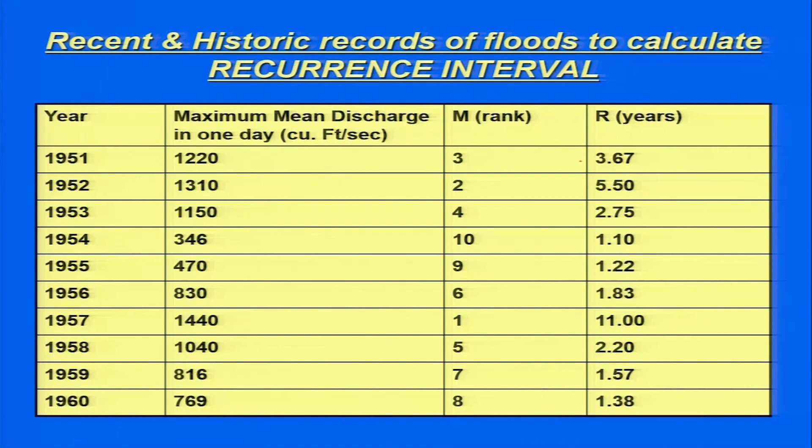Nevertheless, the recurrence interval plays a very important role in flood controls and hazard analysis. For flood controls, the river channel is considered to be in flooding stage when runoff and water spill over the banks.

Based on the cross sectional area and amount of precipitation, the runoff will be controlled by the deposits or the lithology of that particular site or basin.

We saw examples in terms of sandy soil - if the lithology is purely sand which is very porous, infiltration will be very fast and we will have less runoff, which can also be reflected in terms of the drainage density we discussed in previous lectures.

During floods, streams carry and deposit excess mixed sediments, that is bed load, so it is required that the channel should be periodically cleaned. There is an example I will show quickly in the next slide.

This point is mainly for the cross sectional area. If you don't clean the channel, during floods it will deposit excess load that has been carried, because more water is available and the velocity will be higher. So you will have more mixed sediments as bed load deposited after the flood is over, which will reduce the cross sectional area of the channel.

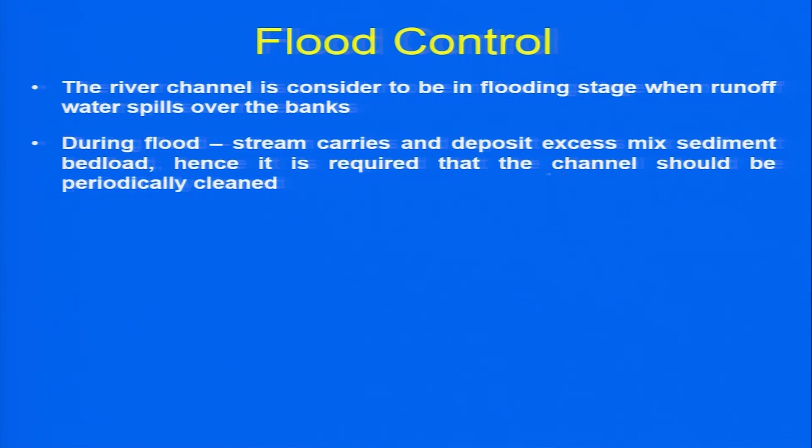Hence you need periodic cleanup of the channel, so that the river bed level is not raised and the height of the banks is deep enough to provide easy way to the next flood water. In most developed countries, and even a few examples from India...

...river training has been done, where a river is forced to flow through a particular path, so that you siphon out the water as early as possible, providing easy way for the water to flow.

Additionally, flood protection can be gained by construction of short walls adjacent to banks - we have seen the example of artificial levee, from 1 to 3 feet high, which may allow some vegetation to grow within the river channel.

There are more examples from Japan and elsewhere which we will discuss in a couple of slides later. These different techniques also benefit wildlife, fish population, and create a scenic view.

In Ahmedabad, the Gujarat government has created a river front, which has also created several parks along its banks, as well as roads for pedestrians and beautiful roads constructed along it.

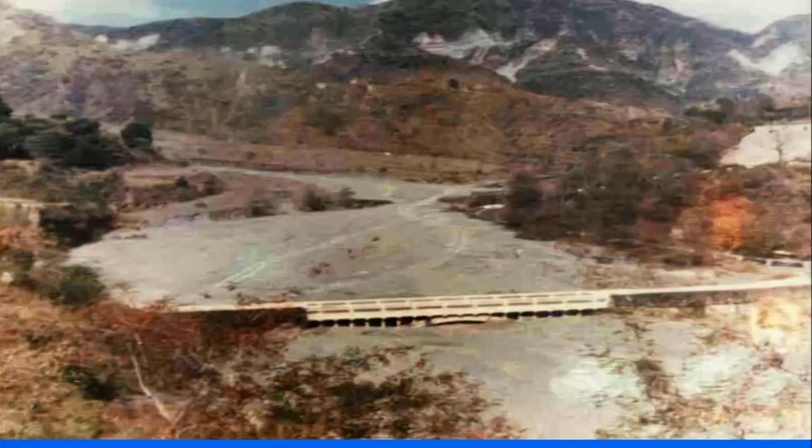At the same time, the depth of the river channel has been maintained because it is completely lined up - essentially an artificial levee - which has resulted in an easy way for the water to pass through. This is the example we also discussed when talking about landslides.

If you talk in terms of floods, this is an old photograph taken in the 1960s showing an active landslide, where loose material is present because of the main boundary thrust shear zone.

A lot of loose material is available, and even a smaller amount of rain will put the material into this channel. Slowly, this bridge gets covered up, so the water will definitely spill over on this road or connecting bridge between two sides of the banks.

So what they do is periodically dredge the channel, creating enough cross sectional area to allow the water to flow down.

To stop the sediments getting filled up in this part particularly, they constructed a retaining wall, but that did not work, as I discussed in the previous lectures when we were talking about the landslide.

It broke because of the subsurface erosion within the channel.

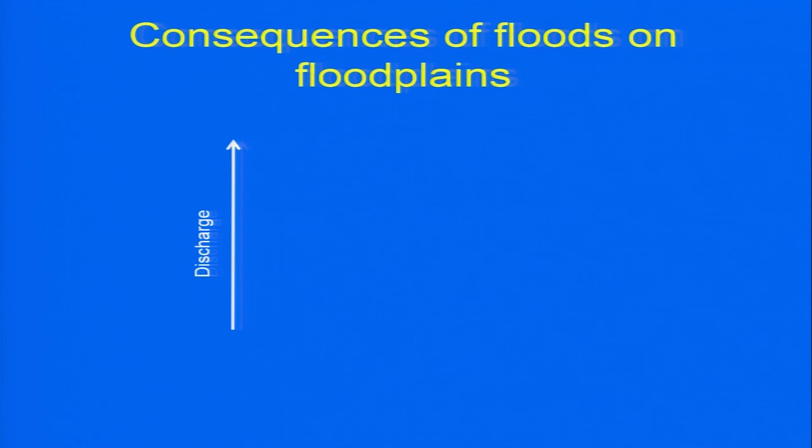Now, consequences of floods on the floodplains - this is, of course, because of our own mistakes.

If you take the hydrograph with discharge on the y-axis and time on the x-axis, the period of rain remains the same, and this hydrograph is quite smooth. It is not spiked, but it is quite smooth.

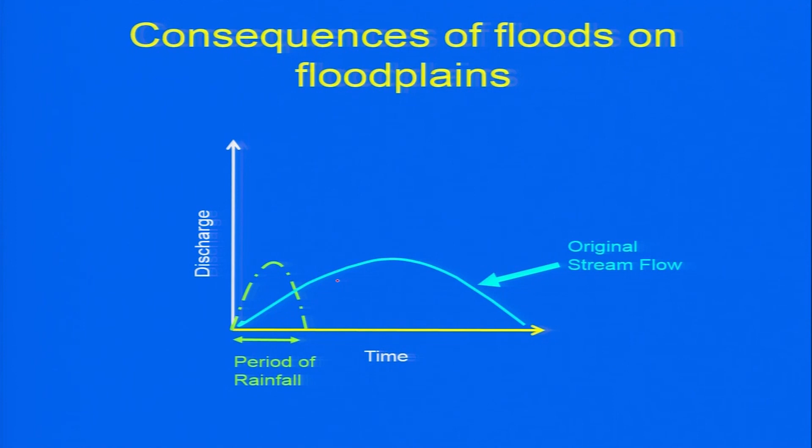This is the original stream flow. So if you are not having anything within the stream, or you have not altered the stream.

You have not constructed your houses or settlements in the way of the stream - then the natural flow was this, that is the hydrograph. So it will take time to come up to the flooding stage.

However, this hydrograph is after urbanization. So basically, what we have seen and experienced in most cities is that we fill up

several low-lying areas, or maybe the channels, and block the channels, and after doing the artificial filling, we use that land for urbanization.

This is very common, either for the construction of parks, or you come up with some colonies or settlements, that is, civil structures. So this hydrograph is after urbanization.

So the time lag which has been seen from the original is this one here - this is a time lag. So very shortly after the rainfall it remains constant here, but the

discharge has increased. At the same time, the time between the rainfall and the river getting into the flooding stage has also reduced.

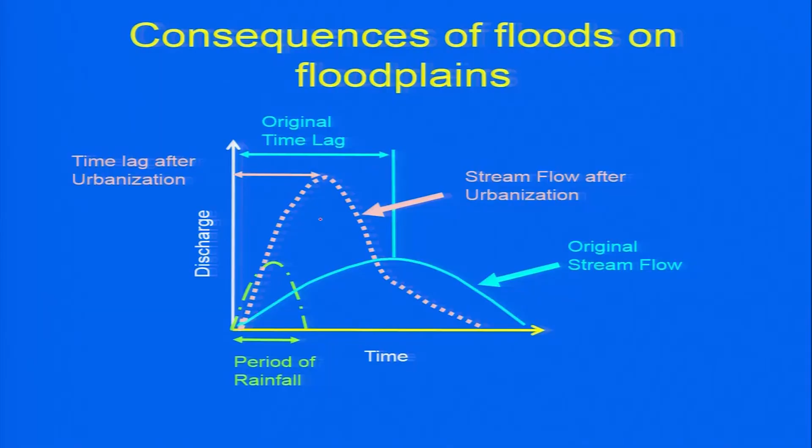So this is very important to understand, and this example shows how things will work, and how we will be affected.

if we don't have a complete understanding of what has happened in the past in terms of flooding events, or the water levels which rose in a particular channel during historic times.

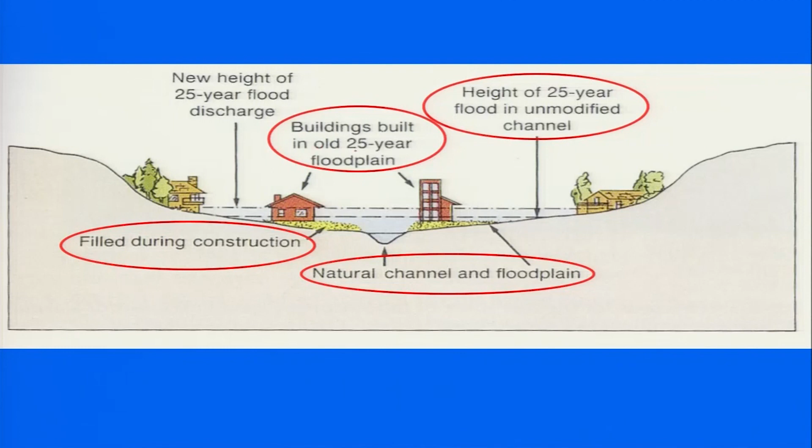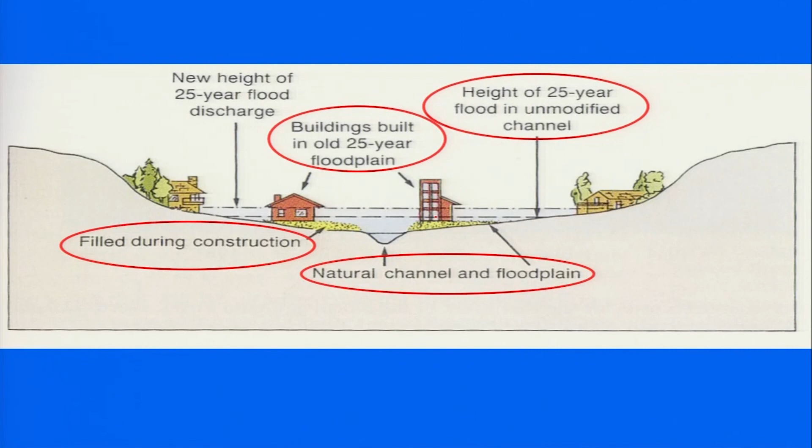So in this floodplain, this used to be the level where, of course, this will be submerged. Now this flood may be repeated in 100 or 200 years, but ultimately

what has been done is that a new height has been created, or we induce this by occupying its floodplain area.

So now the water which used to remain up to this level during the peak flood or peak discharge, we are having a new height for the 25-year flood discharge.

So this is what happens - more area is getting affected because we have choked up its own old floodplain area.

Now, when you find this in urban flooding, you try to understand what we have done in the past.

So the best exercise one can do is examine old satellite photographs or satellite data which was collected before

urbanization, and try to find out what areas we have occupied in the last 25-30 years.

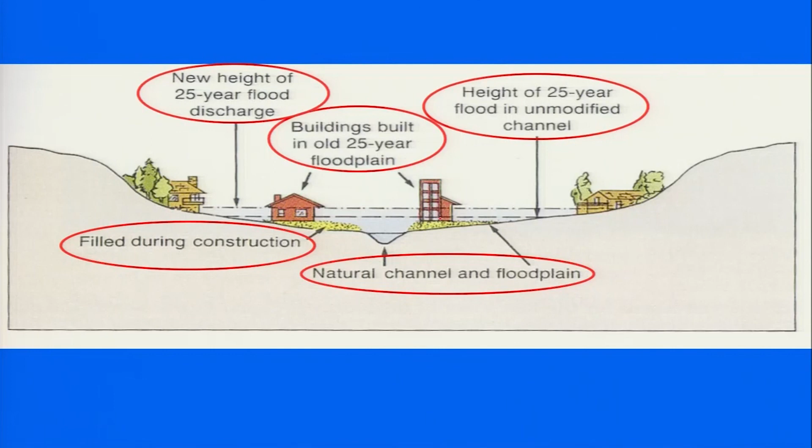The starting point for me was Gandhinagar, and I used to reach my home in almost 30 minutes, but on that day it took me almost 4 hours to cover that distance.

This was mainly because of the inadequate drainage, which was not available, because we kept on using the areas of the river channel itself.

Now, flood hazard zonation and management strategies is very old, but, as I told you, you can come up with your own hazard map depending on the areas which are going to be under flooding. So, flood hazard zone 1, which we will call active floodplain areas: what one can do is prohibit development of business and residential complexes within the floodplain and maintain the area in its natural state.

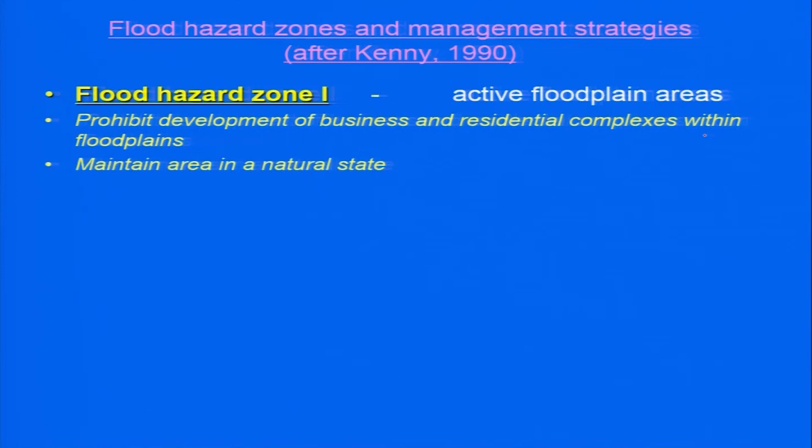Flood hazard zone 2 is mainly in the areas where we have alluvial fan deposits or landforms, and plain areas like the Indo-Gangetic plain, with channel depth less than 1 meter. So, the density of construction should be relatively low in such areas. Dry streams should be maintained in their natural state, or the density of natural vegetation should be increased to facilitate superior water drainage and infiltration. That will mainly reduce your runoff. Construction of houses should be at higher or local level.

For this you can use high resolution satellite data, and now you can also do the mapping with UAVs. So, a detailed geomorphic map should be available, along with the digital elevation model, and based on that you can work out how much area will get inundated during a flood if you have the water levels from past floods.

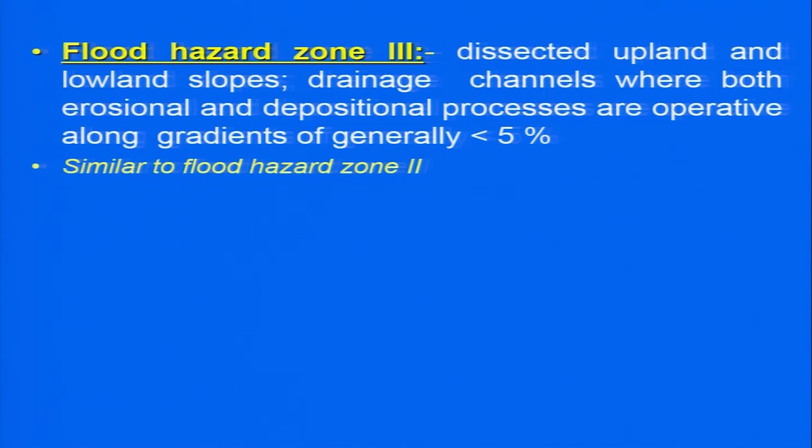Flood hazard zone 3: dissected uplands and lowland slopes, drainage channels where both erosional and depositional processes are operative along gradients of generally less than 5%. Similar to flood zone 2, you can take the precautions here. Roadways which traverse the channel should be reinforced to withstand erosion, because this is very important.

And you should take into consideration the landforms which you will come across in that river basin, whether it is meandering, braided, or a straight channel. We have discussed all those points. We have also discussed landforms and channel forms, and the channel drainage pattern, which will help us understand the erosional pattern and the rock type or lithology of that area.

Flood hazard zone 4 are the steep gradient drainages consisting of incised channels. So we will have deep cut channels in the area adjacent to the outcrops and mountain fronts. This will be closer to the mountain fronts, so we expect a coarser bed load. During a flood, that coarser bed load can affect any residential area in that region.

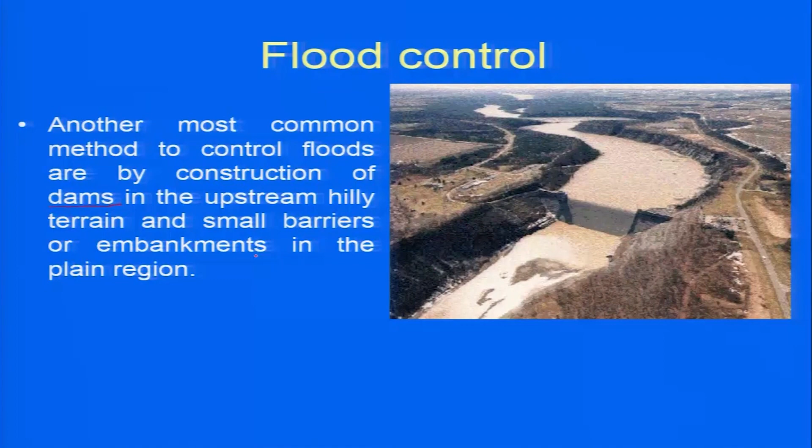Another of the most common methods for flood control is the construction of dams. You can build them in the upstream area so that you can channelize or release the water accordingly, allow water storage, and protect the areas in the downstream region. This is very commonly done.

Now, as we were saying a couple of slides back, the floods are predictable during the monsoon season, because we have this data available every year. In that sense we have a very good amount of data which can help us understand the flooding state of a particular region.

This image is from MODIS, of the Brahmaputra valley, which shows the area that will be affected because of heavy rain. So you can issue warnings, but you have to take into consideration where a particular site is, whether upstream, downstream or in the middle part of the basin. Based on that, one can issue the warnings.

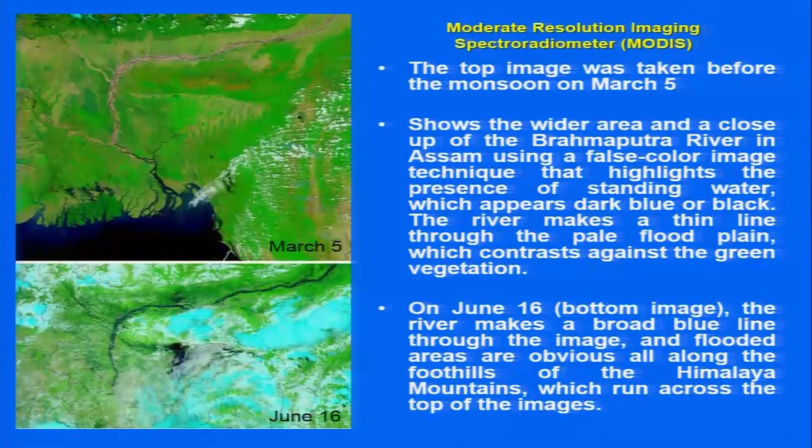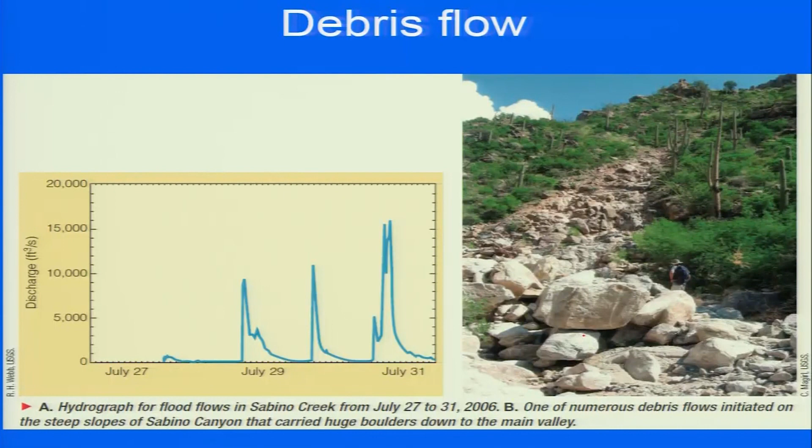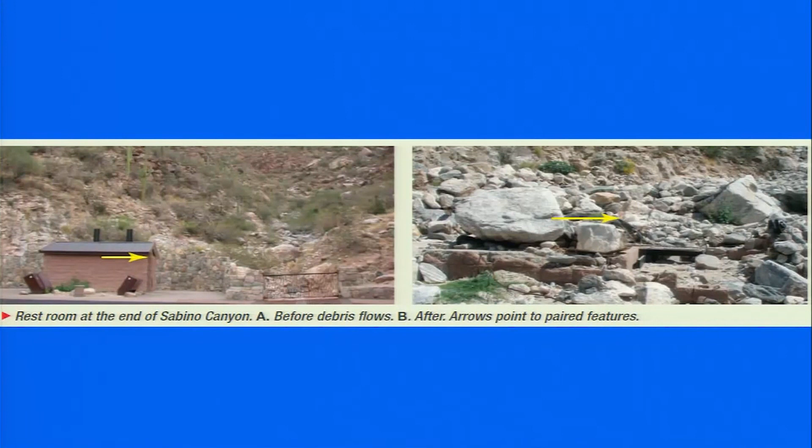We have already discussed this example, so I will quickly move on, but this is again very important. Look at the low lying areas, without a proper understanding of what will happen during the peak discharge, as we discussed with the hydrograph of the normal channel and then after occupying its floodplain areas.

What we saw in the previous slide was that the flow depths increased in this area. This was the photograph from 1978, which we discussed for the landslide, but this is also true for flooding events within the channel. And for the landslide, as I was saying, more important was the undercutting of the channels or the cliffs.

But for this, what is most important is that we have allowed people to go for construction just adjacent to the riverbed, and definitely with the sediment size and all that. If you look closer to this area where I am pointing out here, there is a photograph, maybe I am not having it, but here what we found was that the sediment size was almost 2 meters in diameter.

So you can understand what sort of magnitude of flood one can expect in this channel, what will be the flow depths, and what will happen when there is a peak discharge in this channel. All these houses which are sitting close to the river valley, that is on the terraces, will be affected.

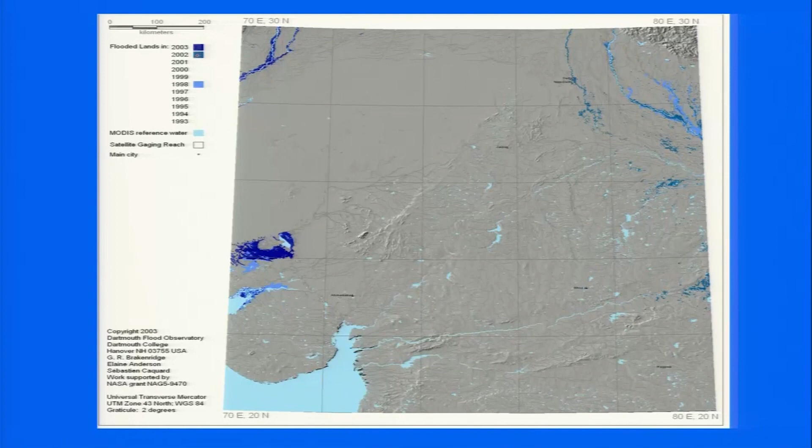This again one can easily monitor. This is from the Dartmouth Flood Observatory. These are all done by remote gauging stations, and the map shows flooding events in 2003, 2002 and 1998. So based on this, one can prepare flood hazard maps.

Another satellite picture which is very important, and we discussed it in the previous lecture also, is how the channel of Kosi, which used to flow through this region for several years, took up a new path, but this path is its own path, that is a paleo channel, and this happened in 2008. So with the help of the satellite data and the gauging stations, you can understand what will be the peak discharge and which areas will be under flooding.

So the red portion, this image is from October 12 to 13, 2009, but it also shows the inundated areas close until 1999 in this region. So most of the time these areas, like in 2009, this river was under flooding, that is your Ganges, and even the Brahmaputra was in a flooding state, and the inundation has been shown here. So we understand that this region in the Indo-Gangetic plain is affected almost every year.

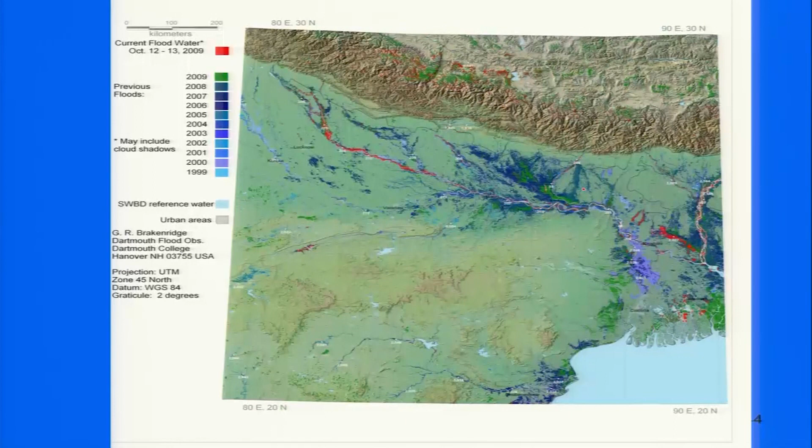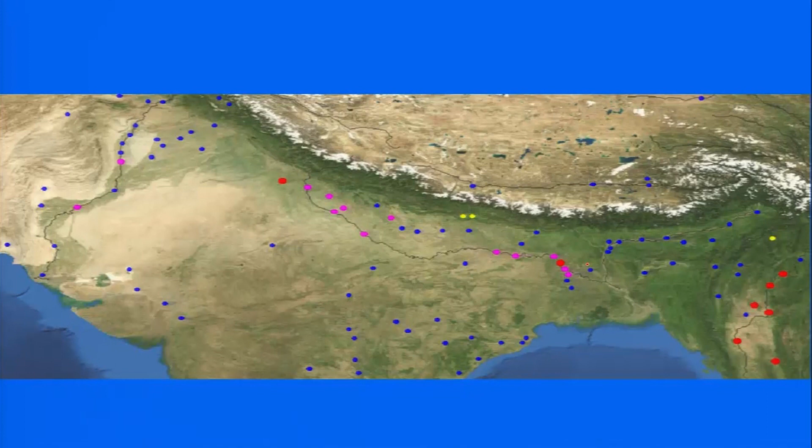So these are the gauging stations. These are all satellite river watch of the Indian subcontinent from the Dartmouth Flood Observatory, a close up of that. So based on these gauging stations, one can also try to find out what will be the discharge and what is the current discharge available during the monsoon season.

Now flood management is of course a very important aspect, where people have been adopting different techniques like hard engineering, soft engineering and administrative measures. So after doing all that, of course the administration should be quite active in playing its role.

So what you do is hard engineering. Based on the recommendations of the surveys and having an understanding of the past floods, one can come up with the construction of embankments, dams, levees, wing dikes. We will come to what wing dikes are. And then detention tanks. So this can help us in putting the water away from the channel into some other area or storage areas, and then it can slowly be released. The dredging of the channels, channel straightening and river interlinking.

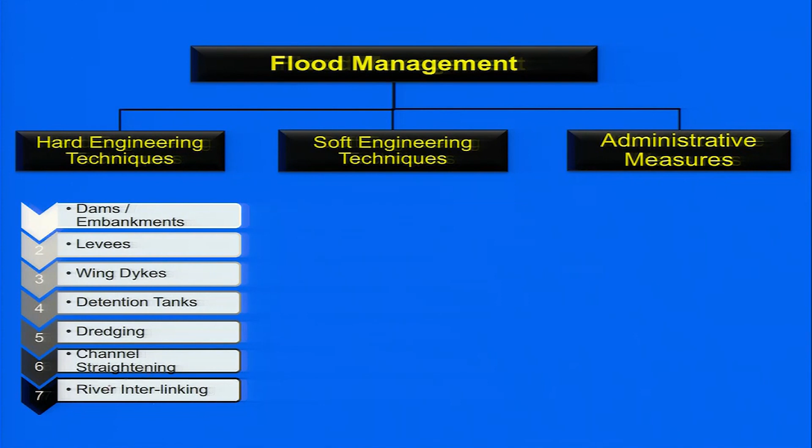So river interlinking can be done where you have the understanding that one river basin has enough water and can get into a flooding state every year, whereas the rivers in the nearby regions are not having enough water. So you can put that excess water into those rivers, and that can also help in terms of rejuvenation of the rivers, as well as we can use the water for irrigation and for mankind in that region.

But the issue that remains, in India or maybe in any other country, is that when the river flows through any particular region, it has a different lithology. So the chemistry of the water will differ from one place to another. We can have a very long discussion on this part, but of course these were the points raised during one of the workshops where we talked about river linking. So how can we control the chemistry? It is quite difficult, that is, the water chemistry of a particular river. Anyways, then we come to the next one.

Then we have soft engineering, where you can do afforestation, river restoration, wetland restoration, watershed management, flood risk and vulnerability analysis, floodplain risk zoning. So there are a few more things here. And then finally, with this information, you can issue flood warnings, rescue and evacuation plans, and enforce floodplain zoning regulations.

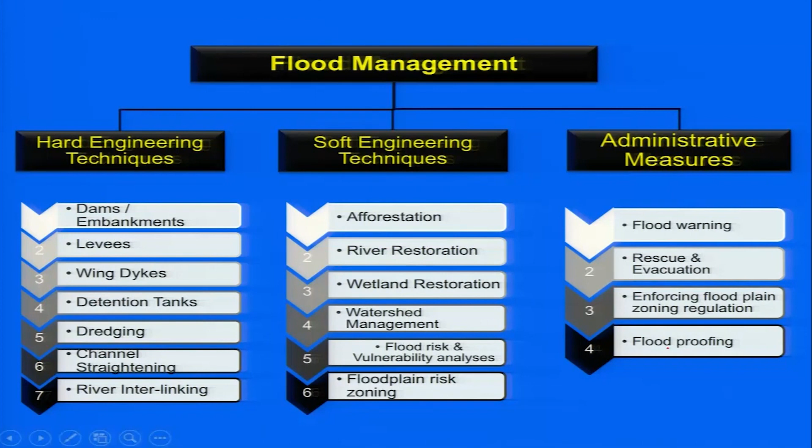So hard engineering, these are the wing dikes which have been constructed, and this is an example from a Chinese river, where they have constructed wing dikes, and this also tries to divert the flow. And finally, what you see here is that you can have fantastic development in this region.

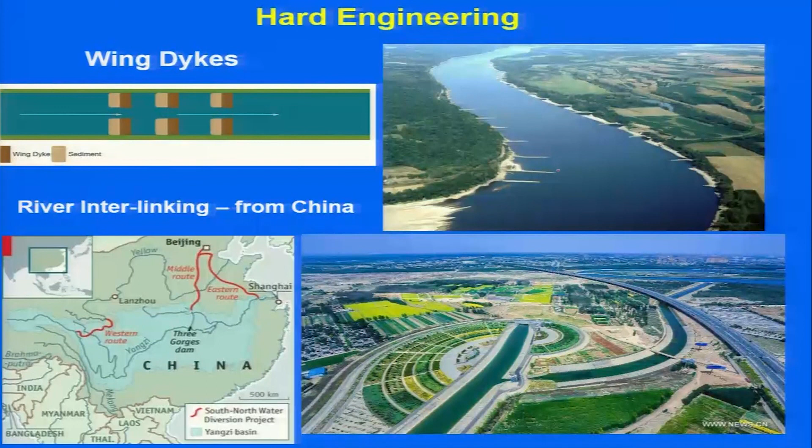So basically the wing dikes will be helpful in slowing down the velocity here, and to some extent it will reduce the impact on the areas in terms of the erosion and all that.

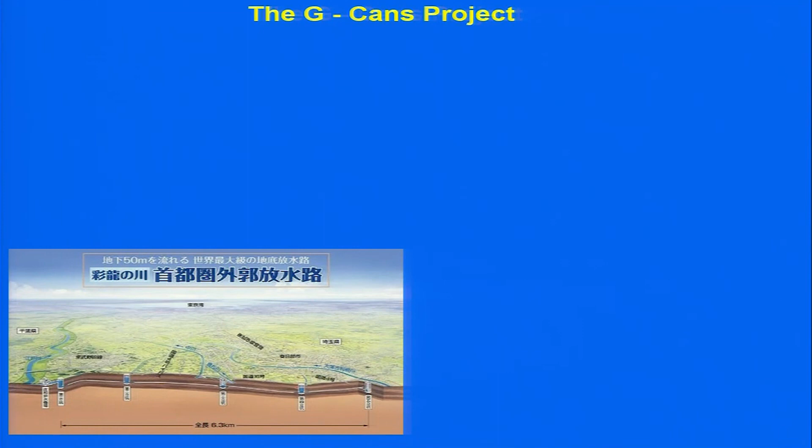This is another very state-of-the-art example from Japan, where the pillars which you see here are basically tanks. So it says the G-CANS project, and these are all the underground discharge channels. Okay. So what they have is underground tanks which are interconnected, and those tanks are connected to the different channels.

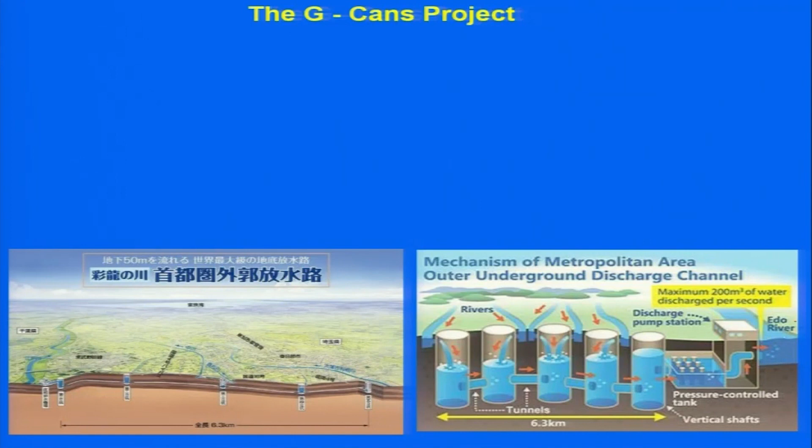So the excess amount of water during the flooding state is diverted to these tanks, and these tanks will keep filling up. And finally, depending on the capacity, if it has more water, then it will be released to the nearby main channel. So the water has been diverted from the smaller tributaries, which are a part of the major river system here, that is the Edo River.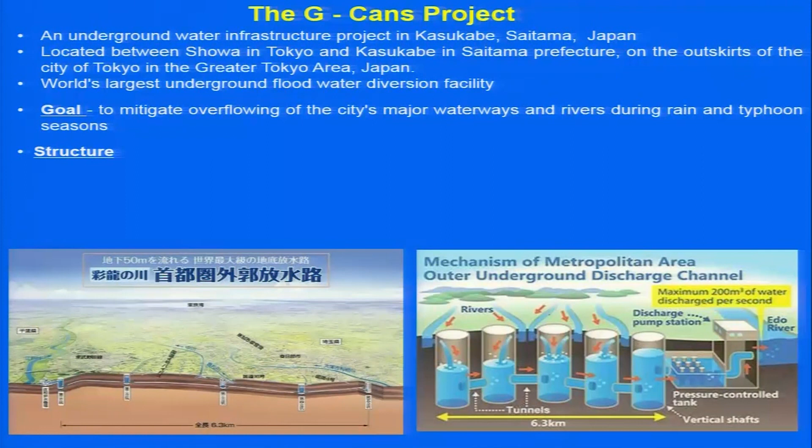What basically it will do is reduce the water getting into the main channel, and it will restrict the flooding in the main channel, because if this channel gets more water or runoff, then you will have the flooding state very soon. So that has been reduced, and slowly it is released in the area where you have less population. So it will be siphoned out, or diverted, and this can be used for other purposes also.

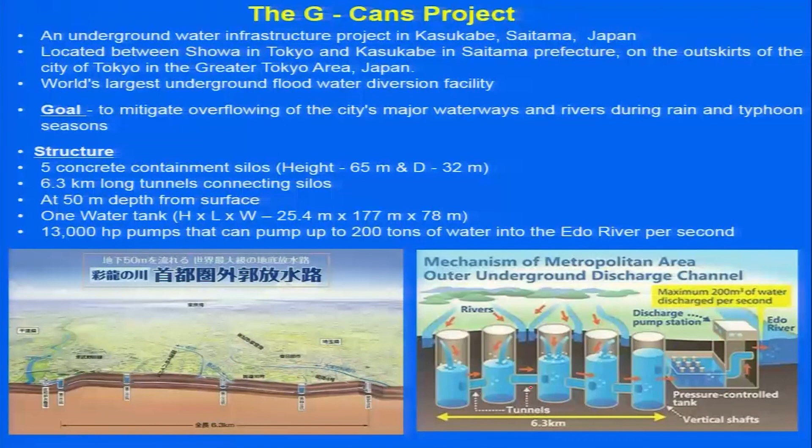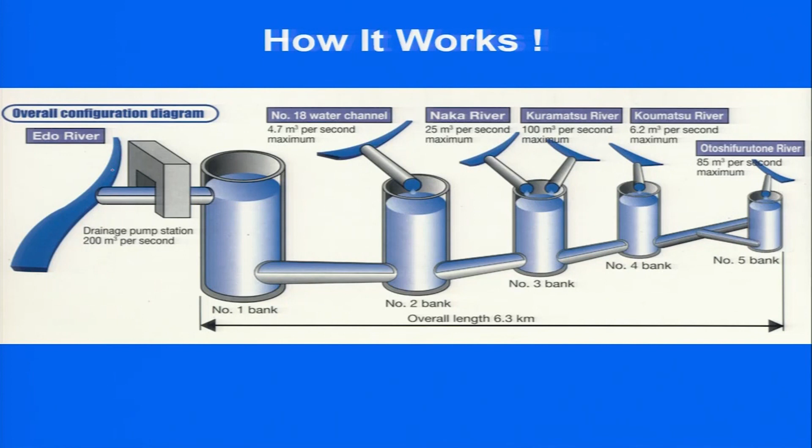So this is how it works. You have the collection from different channels here, the water is getting in. These are the names of the different channels which are the tributaries of the main Edo channel, and of course it will be released in the same channel. So you are not wasting the water, but you are siphoning out the water, not allowing it to overflow in the urban settlements. So in that case you are protecting them.

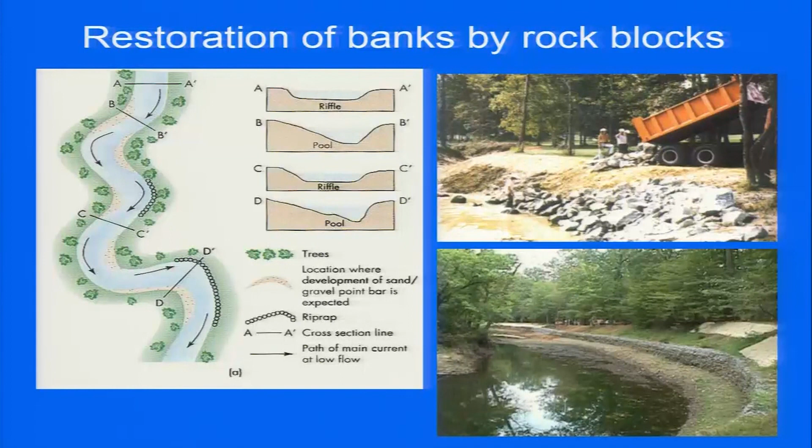Okay. So this is one example, and the restoration of the banks is most commonly seen in many areas, where with an understanding of the channel form, which will be the erosive side and which will be the depositional side, you can go on with the selection. This shows the restoration of the banks with rock blocks, and then you can have very channelized flows. This photograph is before and during the construction or restoration of the bank, and this is after that.

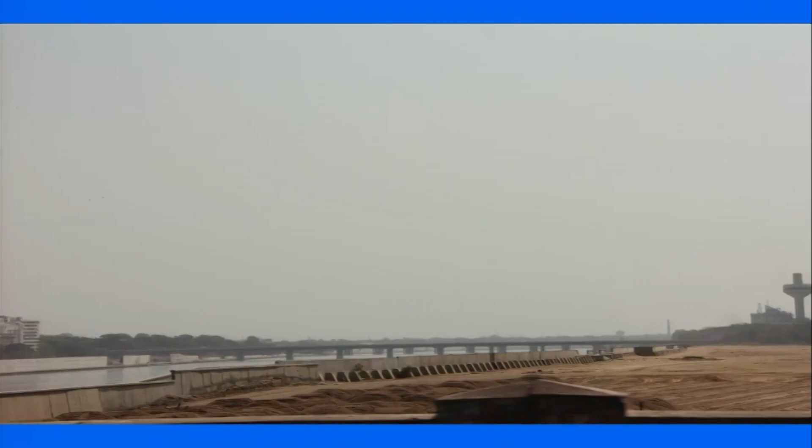So thank you so much, and we'll continue with the next topic on tsunamis, and we also plan to give you one project, or maybe we can have one discussion on the tsunami modeling part. Okay. Thank you so much.